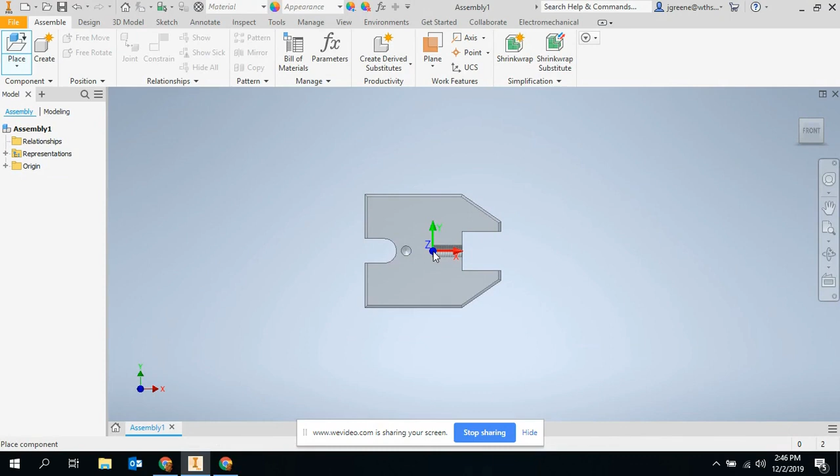So here's the base, I'm going to select open. Depending on how you draw it, you might want to utilize the right click menu to rotate this around. I'll right click, get a little menu that pops up, and rotate it on the X first to get it flat.

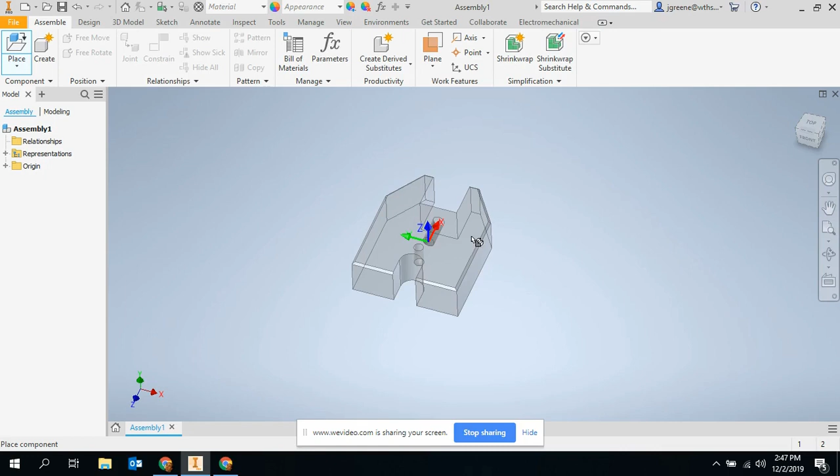Then if I look at it from an angle, I want to rotate it on the Z. Again, this might not be what yours is, but I'll go ahead and click that. Now, what I should have done is right click and place that grounded, but since I didn't, I'm just going to right click the part over here on the left and ground it. So that part's grounded. Next, I'm going to go ahead and place the column.

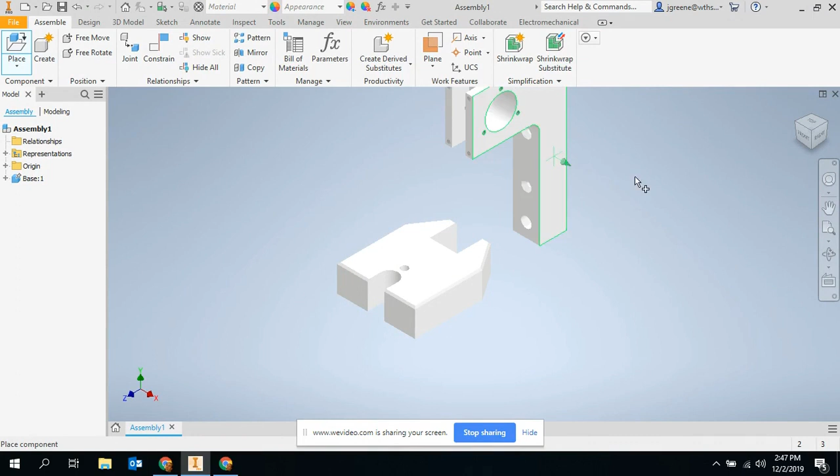I'm going to rotate the column on the Y a few times, click. First thing I'm going to do is align the screw hole for the column and the base. So I'll go constrain, find the center of this hole — either the centers work or the center of the threaded hole — and apply those.

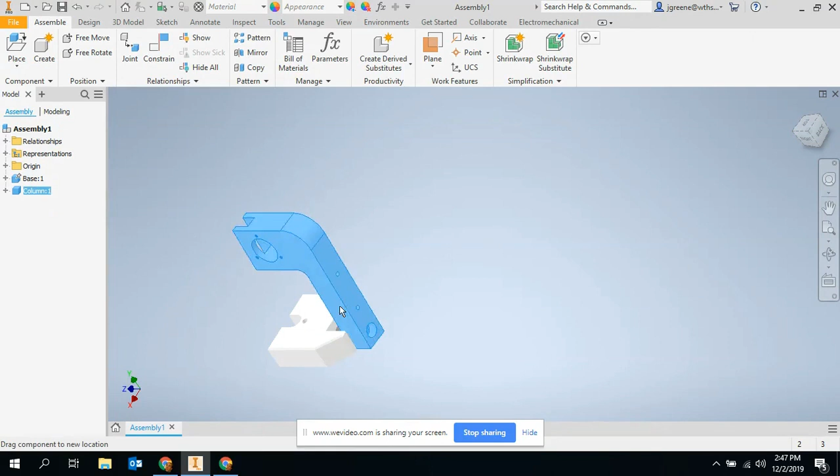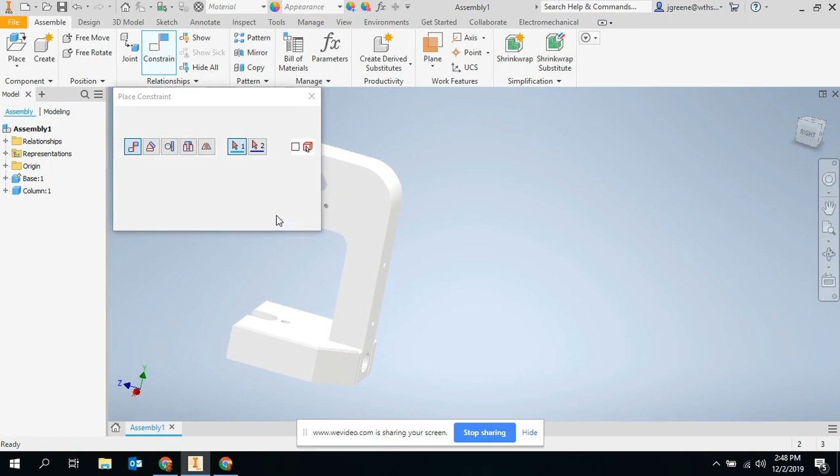I'm just going to cancel and bring that out. Then I'm going to mate the face here to this face, apply. If you do that, this will still be able to rotate around, and we don't want that to happen. So I'm going to constrain and actually flush the bottom of the base and the column, and that'll keep it upright. I'll apply that and get it in place.

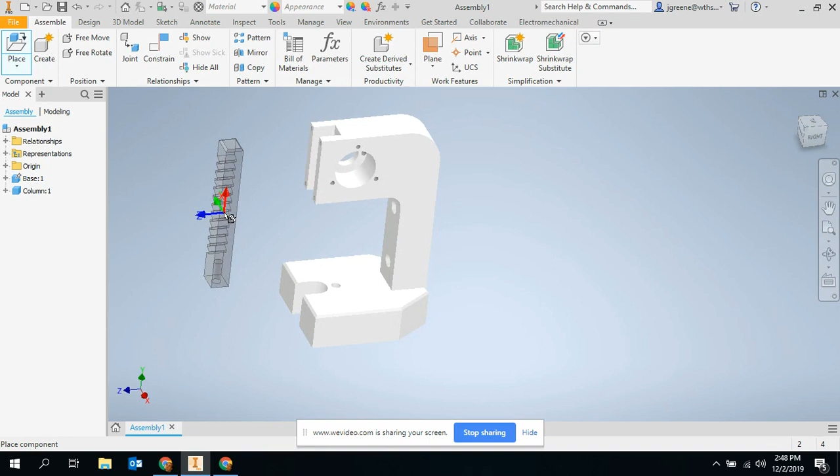All right, good deal. Next, let's go ahead and bring in a few other pieces. I'm actually going to bring in the rack next. Let's rotate that on the Z, and then on the X a few times. And there we go, so we kind of wanted that orientation.

Next, you can constrain this regularly if you want — you want that to stick inside of the channel here. I'm actually going to use a joint. A joint is a constraint, but the difference is a constraint is actually removing degrees of freedom, while a joint is defining more degrees of freedom, like it can move this way and this way only.

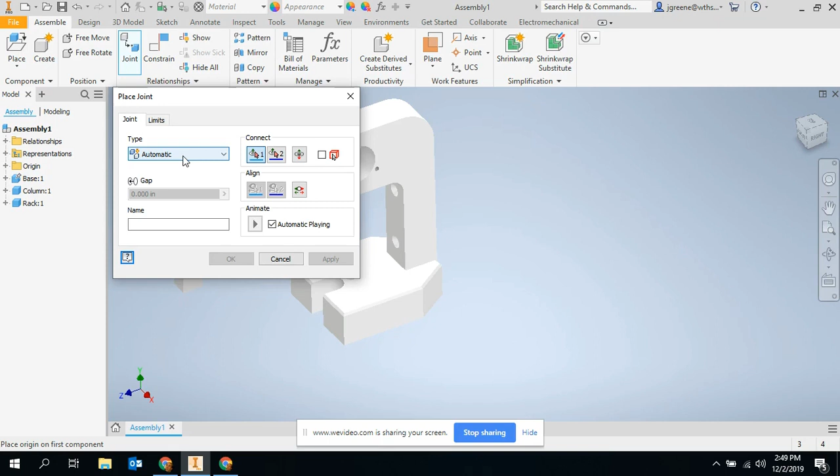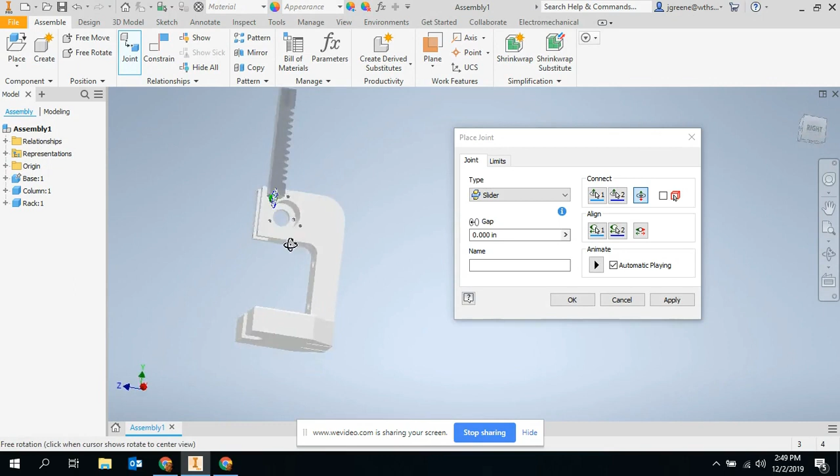So for this joint, I'm going to select a slider constraint because I want this to slide up and down. I'll select this face right here, the center dot, and select this center dot on this face. Now it's going to bring it in there. The rotation is the wrong way, but that's okay — we're going to invert alignment, so it is going up and down now, which is good.

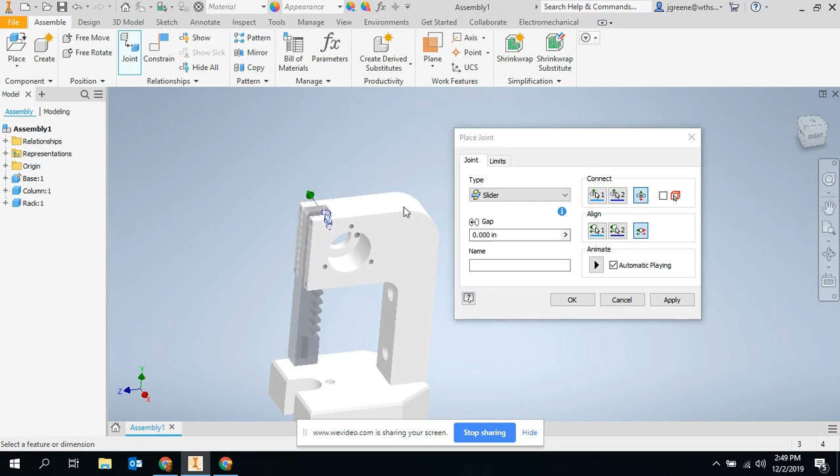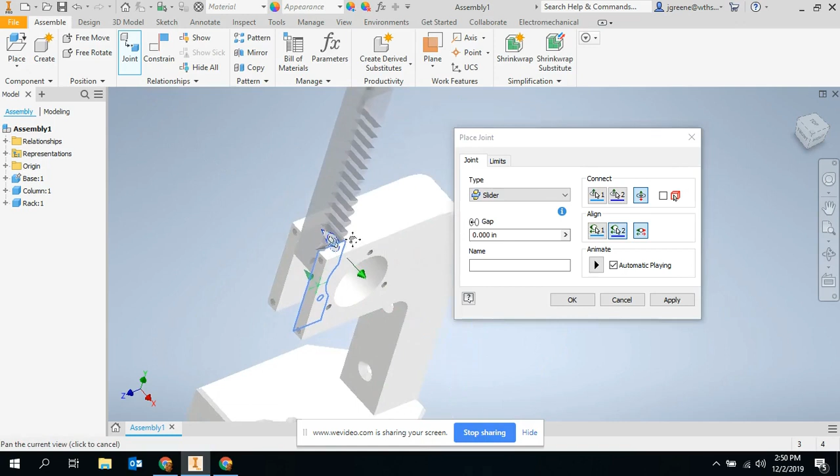Then I am going to change how it's connected. I know I want this connection to be there, and then for my second connection, I want this to actually rotate up and down. So let's put that in there and align it. Our first alignment is fine, let's do our second alignment — if you click on second alignment instead, I'm going to align this to a bottom face on the column.

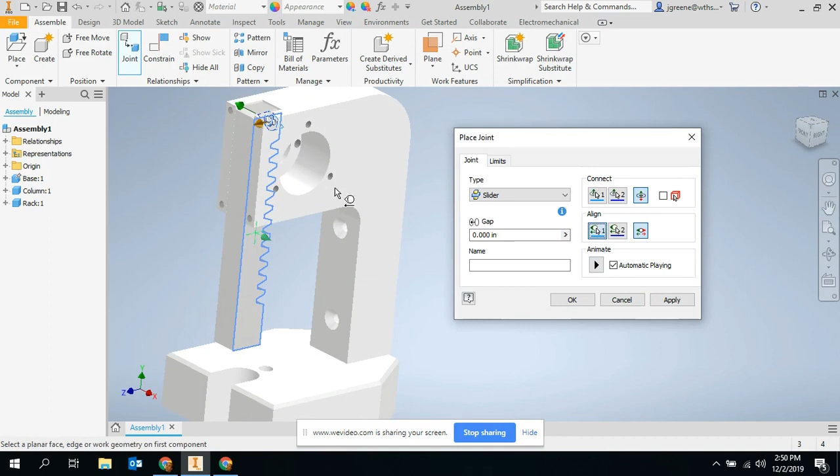So I'm going to select that inside face. It still moves that way, so I'll apply this to the top and say the top is going to align with the bottom of the column. Let's play that — there we go, that's kind of what I want.

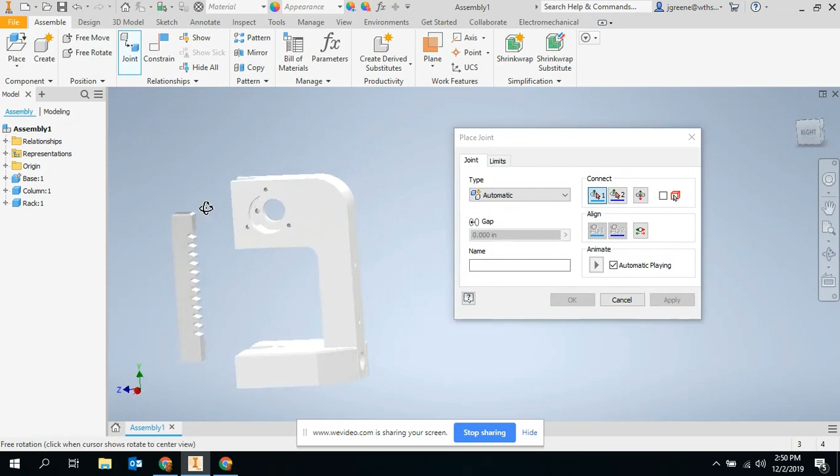So let's go through how we did that again. I'm going to go joint, select this face and this center dot once it shows up. I'll invert connection, change that to slider, and align.

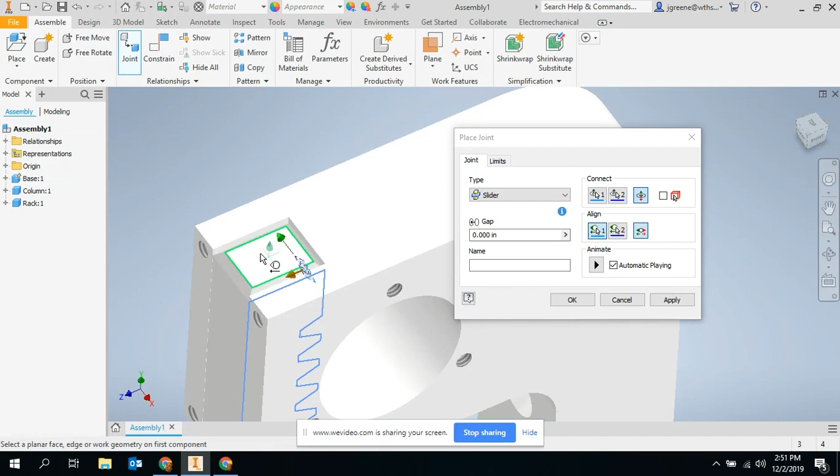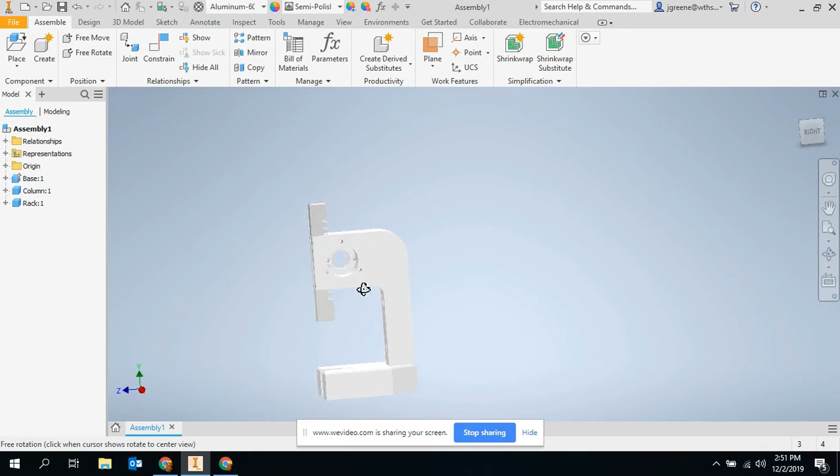So I'm going to select my first alignment, which will be the top of my device, and then it'll ask me for the second alignment, which will be the bottom of the column here. When I do that, you can see the two arrows, one going down, and I play that — that will be the motion of that piece in there. I'll apply that and double check — moves in there very nicely. Okay, next place, let's go ahead and bring in that gear.

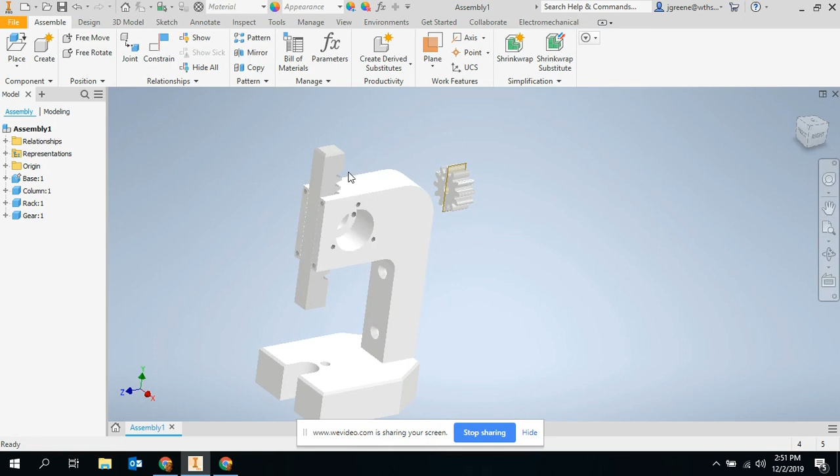Ignore the hole in this gear, it's just something I was playing with. But in this gear, what we'll do is constrain, and align the centers.

Then I'm going to flush this face of the gear and the face of the rack. Apply that. So now this should rotate in there. This goes up and down.

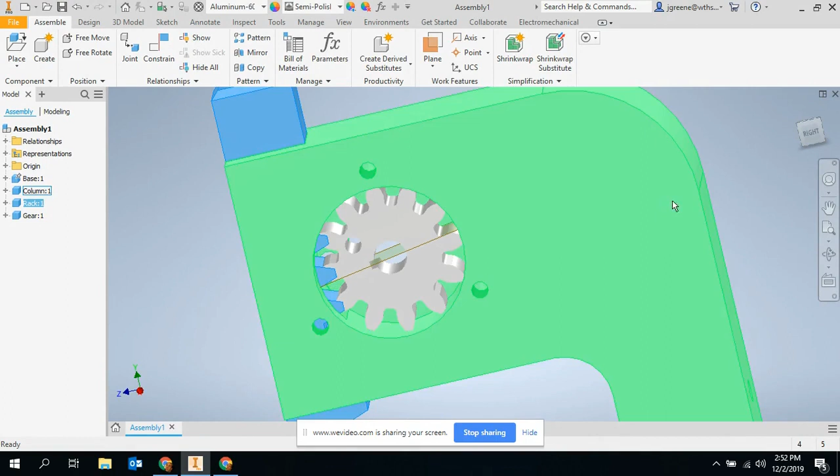Fantastic. I'm going to do one more constraint here, aligning these. So I'm going to move this so my gear is actually between the gears on my rack, kind of like this.

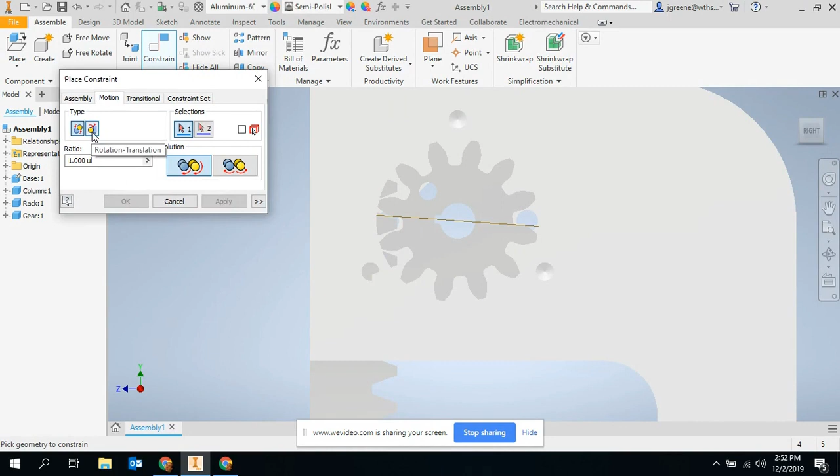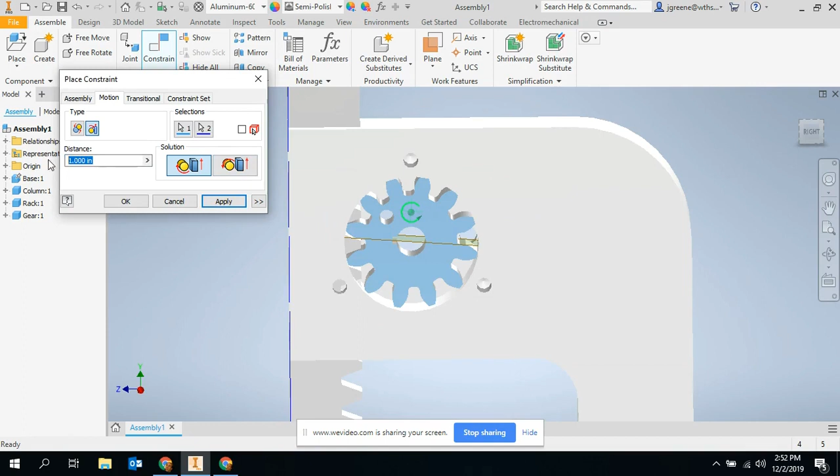Now I'm going to constrain, and I'm going to make a motion constraint, selecting rotation translation. This is rotating, this is translating. I'll select this face as my rotating component, and then select an edge over here on this face as my translation component. My distance is essentially how much I want this to move for every one rotation, and that's going to be a ratio of pi.

So I'm going to apply that, and just double check it's not going the wrong way - that sometimes happens. So there we go. As I move the gear, my rack also moves. A little rotational constraint, pretty neat.

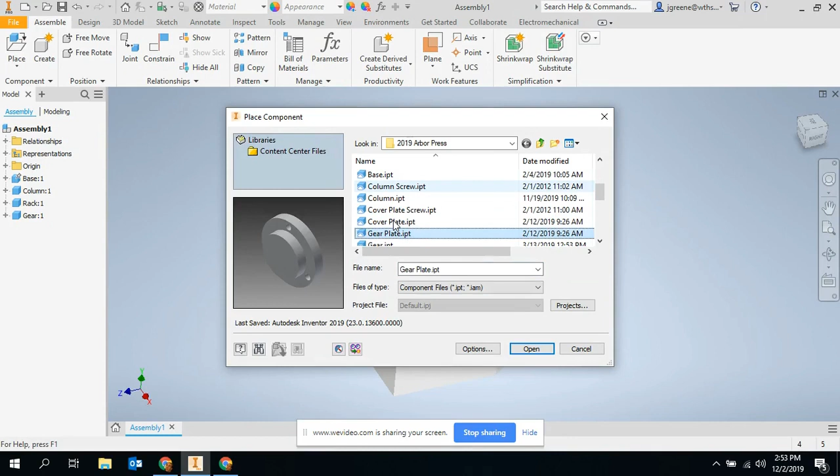So I have that in place. I'm going to go ahead and place now - let's see, what else. Eventually I'll bring those in - I'll bring my cover plate in, that can go over there. My gear plate, bring that there.

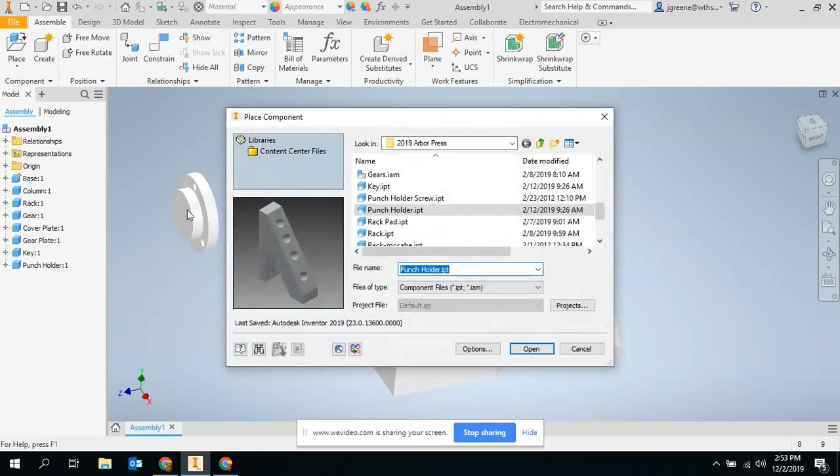Bring the key over there. Punch holder on the back. Rotary actuator back here. Table, and then the table pin, and then we'll put in some screws and stuff later.

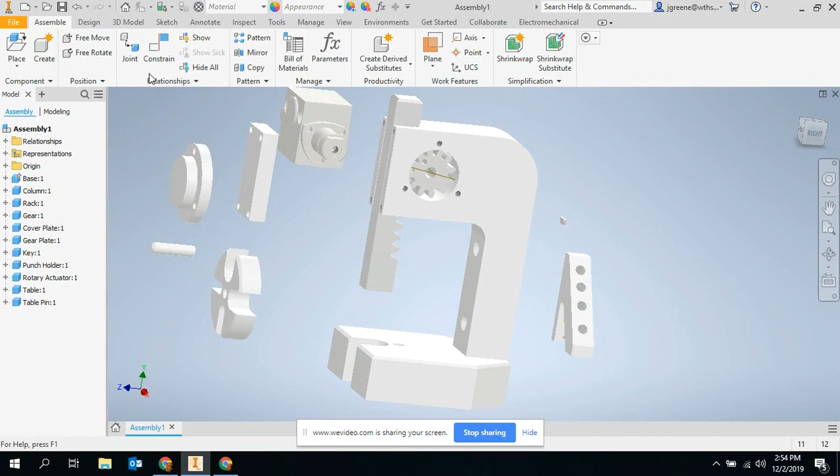So alright, for this we got our table. Let's go ahead and constrain the centers of the table and this little hole right here. Apply. I'm going to bring that up a little bit, and constrain the bottom of the table to the top of the base. Apply. Then I'm going to align the centers of this together.

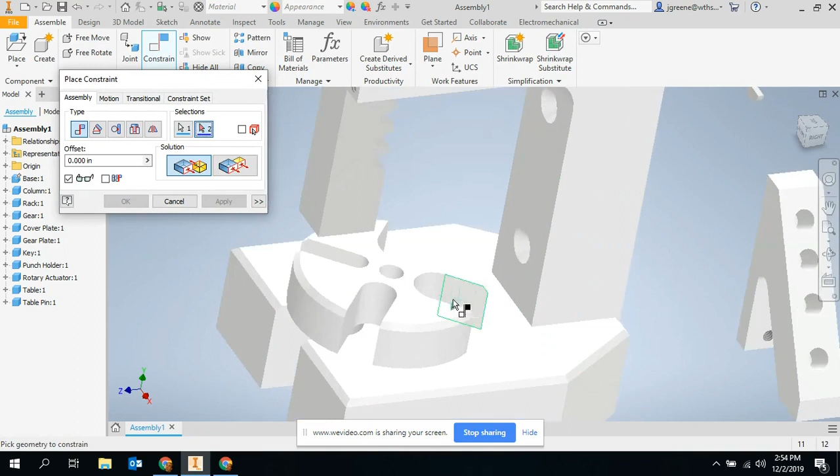And then I want to swap that because I want the chamfer to actually go down into the hole. Actually, do I? I think so. And then I want this to kind of sit down in the hole.

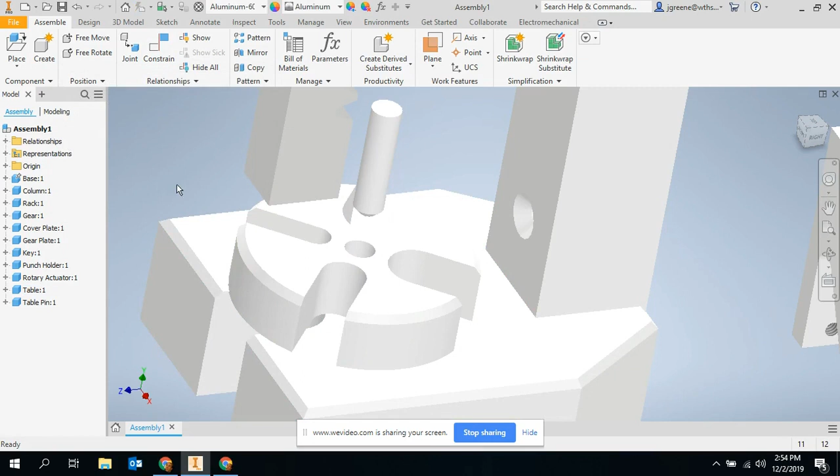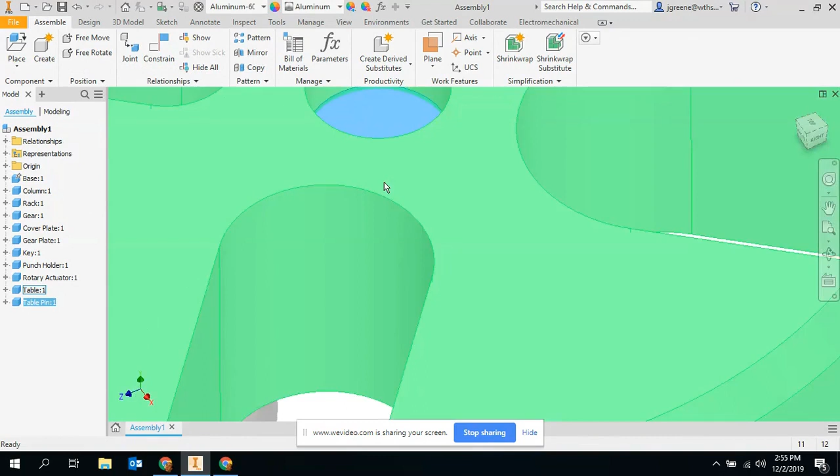So what I'm going to do is constrain this edge - this is going to be hard to see, actually, but I'm going to rotate it so I can see this edge right here. So this is the bottom of the hole, and I'm going to align those two edges together, putting those two together. The top of it is just like a little bit offset in there. And this will still rotate around there.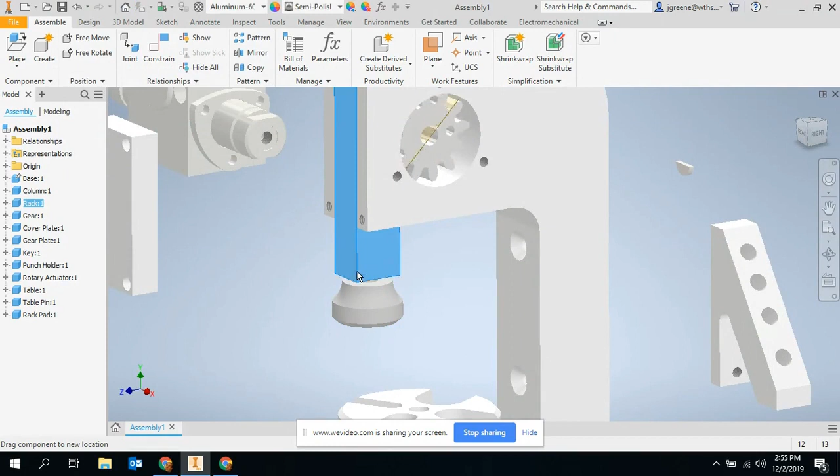I'm going to bring this up, and I know I have a rack pad. I'll bring the rack pad in because that's an easy one to constrain - the center of the rack pad to the center here. I'm just going to drag this up a little bit, and constrain the faces. Apply that. So now that can go up and down.

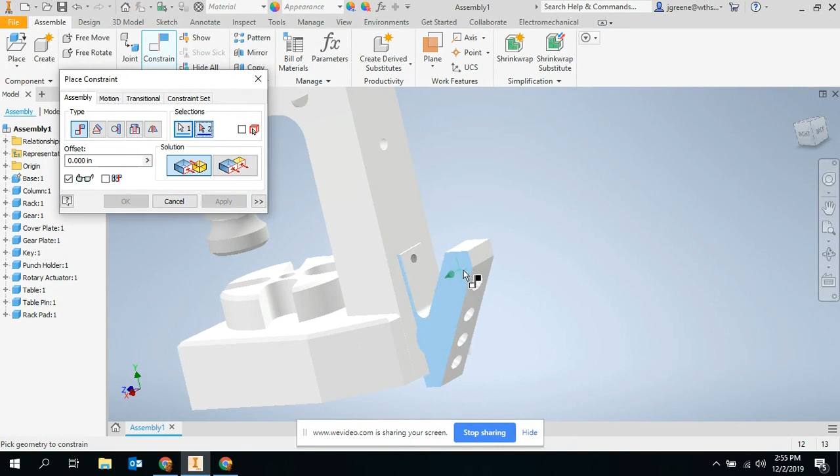I'll constrain the back punch holder to here. I'm going to flip that. Apply. And then I'll constrain the top - get the center there, that should line up.

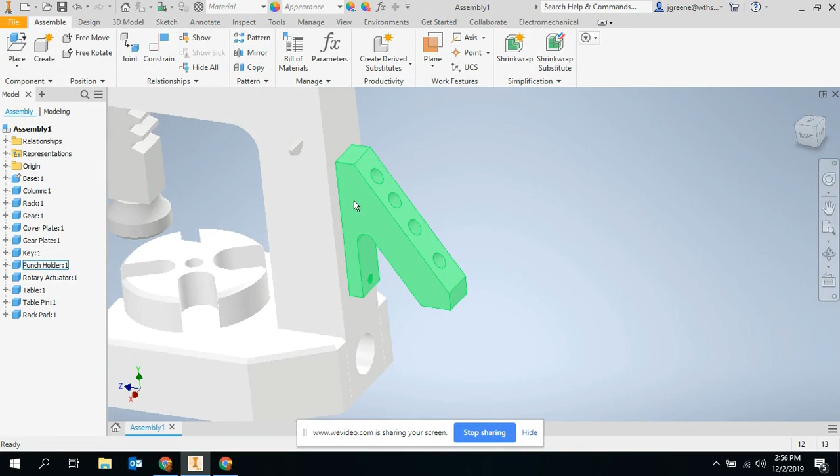And then the back here and the back there. If those centers don't line up, that means the distance between those two holes is wrong, either on your column or on the punch holder. Okay.

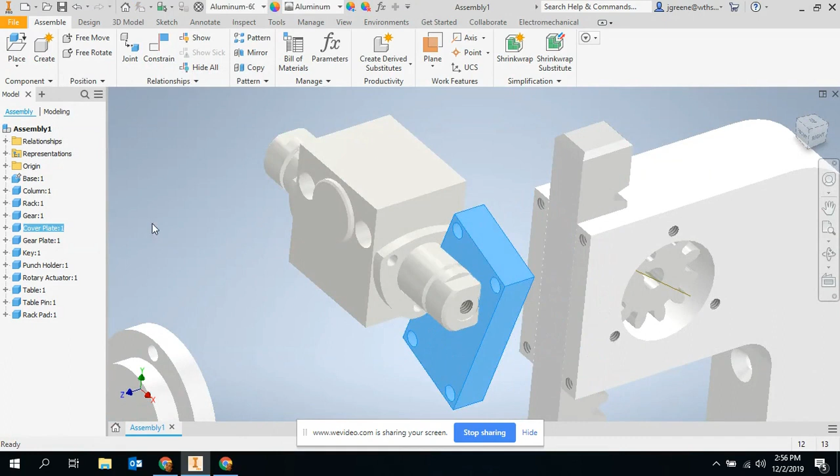I can put this front cover on. So I'll line up that hole - this will be able to rotate on there. So I'm going to align this hole with this bottom hole. So I kind of just did the two opposite holes.

And then I will throw the faces aligned - make sure I click the right face. So that face and that face. Okay, so that's in position. Looks good. Now the gear plate.

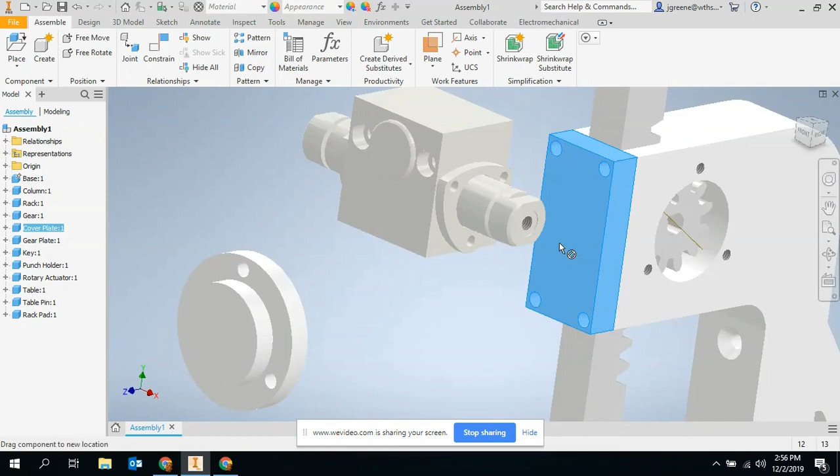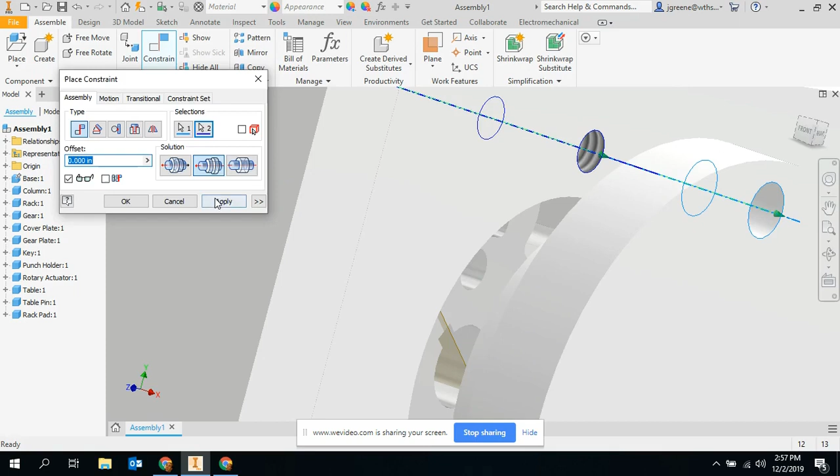Line up the centers of that and that. Apply. Pull it out just a bit. Now I'm going to line up the center of these holes. I only need to do one, the other two will be good.

And then I'm going to throw this face onto that face. Apply. So now that's covered on that side. This still works. Okay.

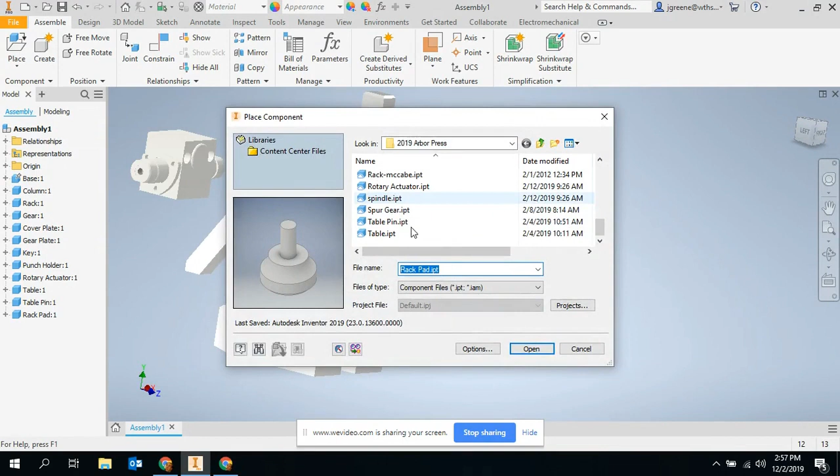Next, I need to bring in the spindle. Okay, so the spindle already has a key in it, which makes it nice and easy. So the spindle is going to go right here in that area. So to do this, I'm going to first align this...

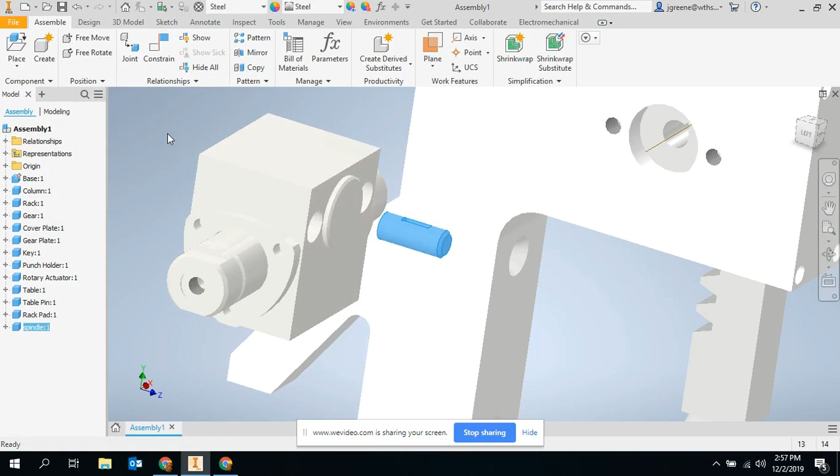and then this face, this kind of little nub that comes up - I'm going to align those two. This comes out. Then I'm going to constrain this face to that face. Apply. And then this should still be able to turn, which it does. Okay.

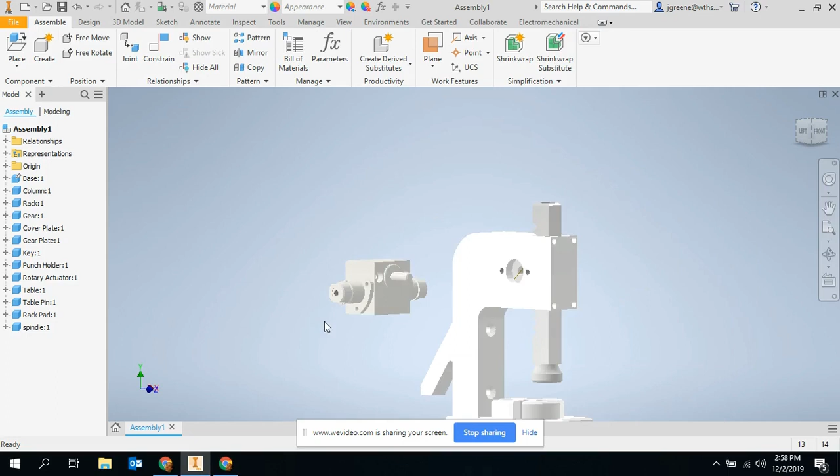Okay, next. Do we do this one yet? Sure. I'm going to go ahead and constrain this to this piece right here. So we'll just line up the holes over here and here.

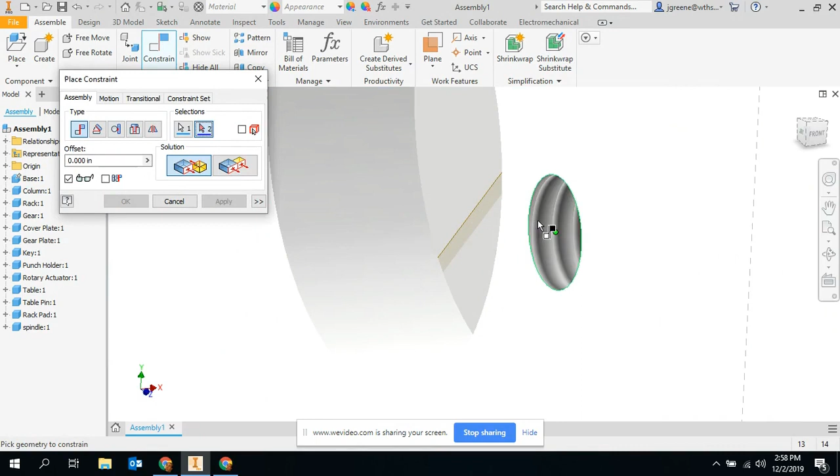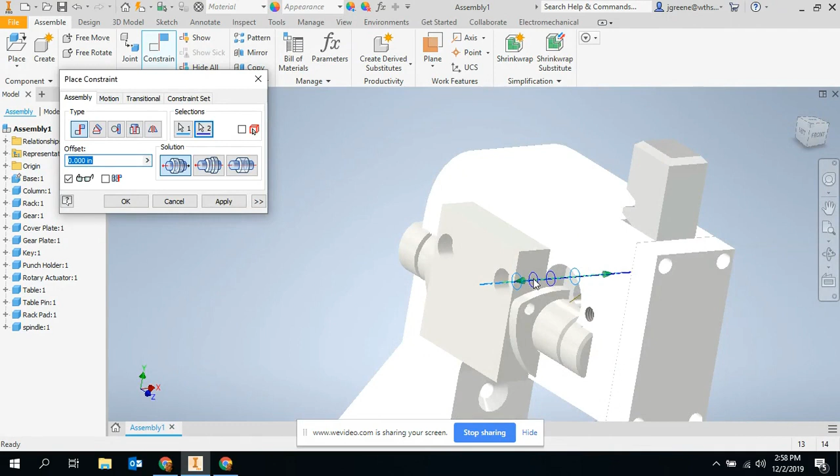All right, so I think this needs to be flipped. So this hole will need to go into this hole. Apply, and then this one aligned with this one. Apply. Let's pull this out. Does that make sense? Yep.

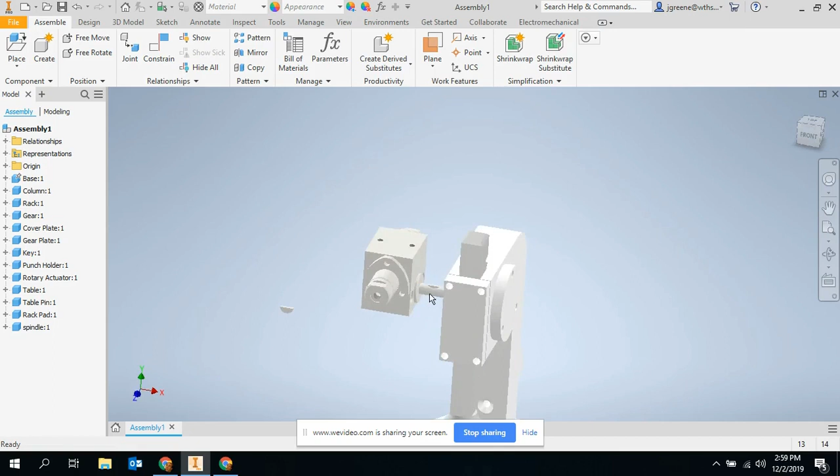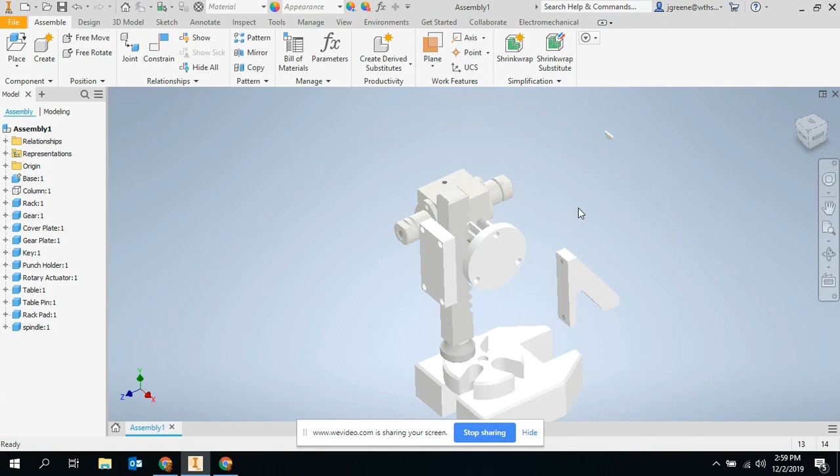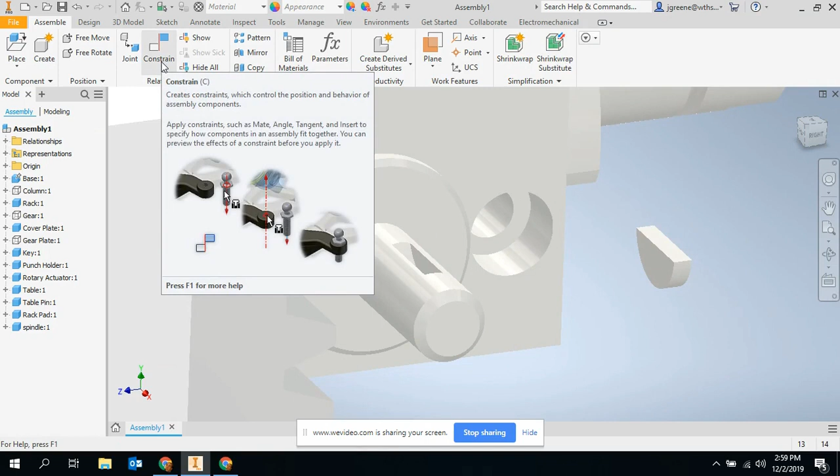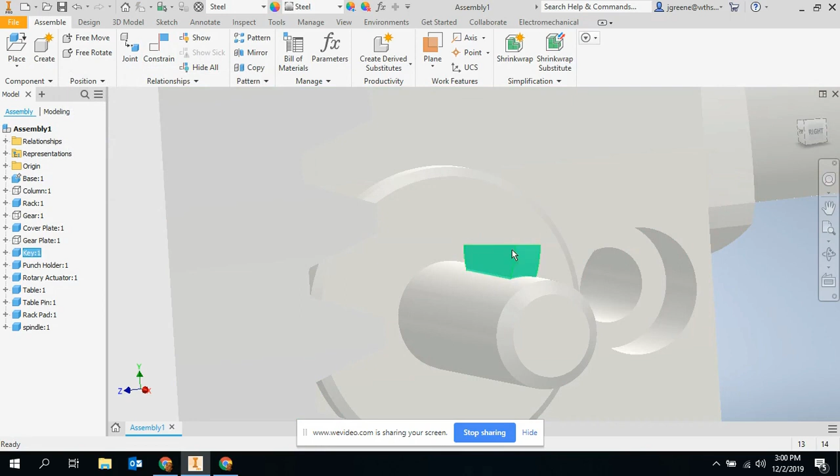For the key, we're going to go ahead and put the key in now. So the best way to put this key in is going to be, let's do this. I'm going to constrain this face to this face right here. I will then constrain the centers together, apply, and then it'll be in there, but you can see here it can kind of rotate, or it can rock back and forth in that little area.

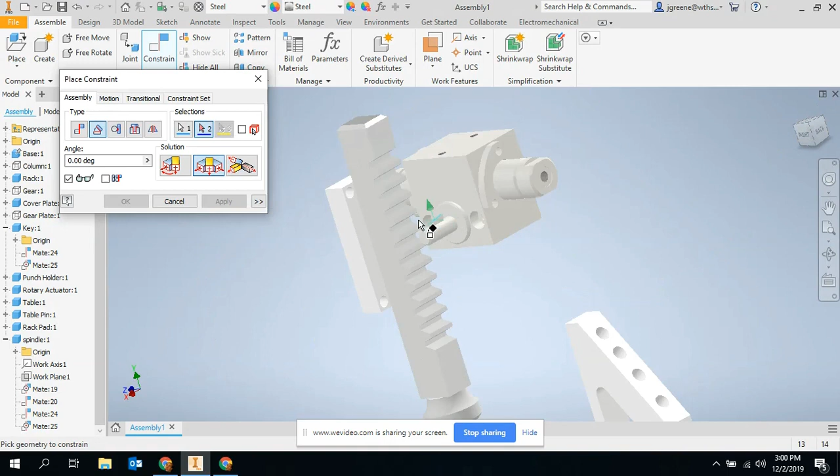So now in my spindle and in my key, I'm going to go constrain. I'm going to go angle, go to the top of my key, click the top, and do an undirected angle. And I want this angle to always be 0 degrees from a part on the spindle. This will be the XZ plane in this case. So I'm going to apply that, and then this should rotate and not move around too much, which is fantastic.

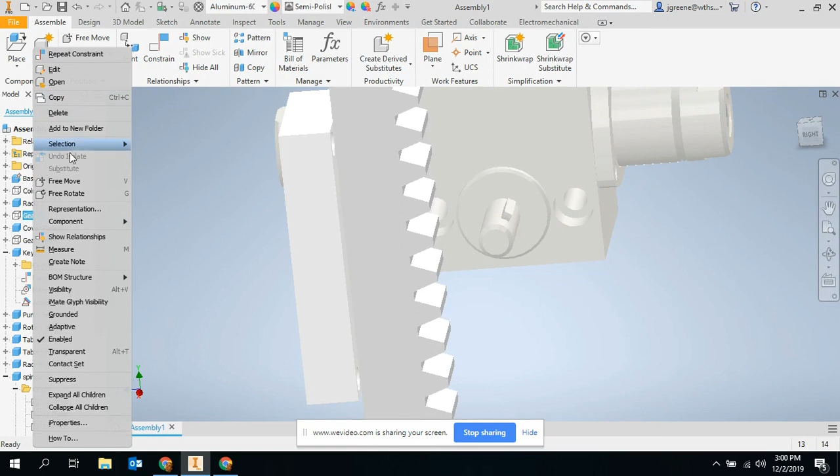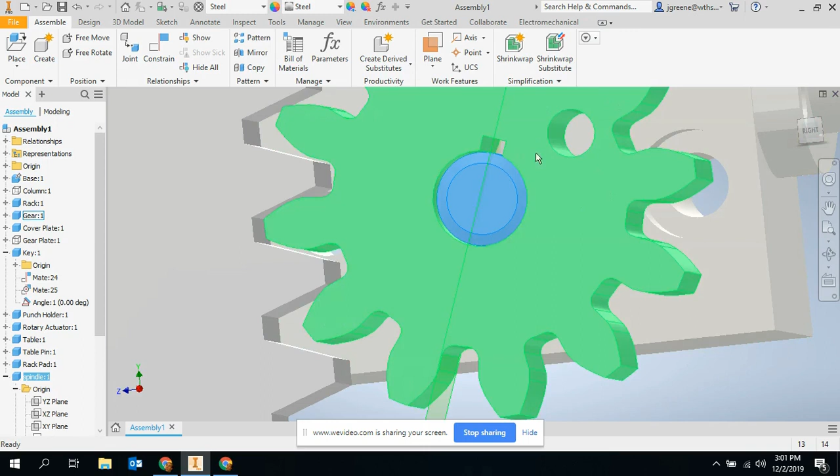I'm going to find my gear, and I'm going to turn on the visibility of my gear. And it's going to be a little difficult. Let's see if I can get this done. What I want to happen is as I turn this spindle, I want to be able to also turn the gear. So I'm going to rotate this till I see the key. I can see the side of the key in there.

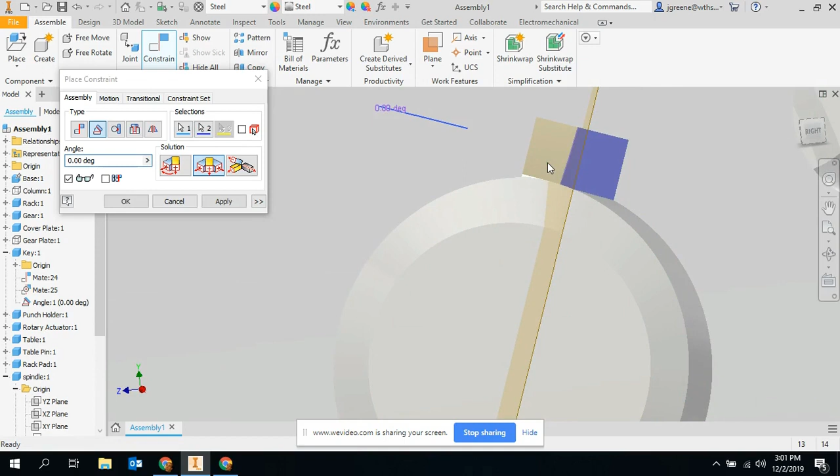And I'm going to say that this side of the key is going to be, I'm not going to make it flush because it might not be the same size. So I'm going to do an angle undirected again between that face of the key and one of the sides of the keyway. I'm going to apply that. So now when I turn this spindle, it turns the gear and it turns the rack.

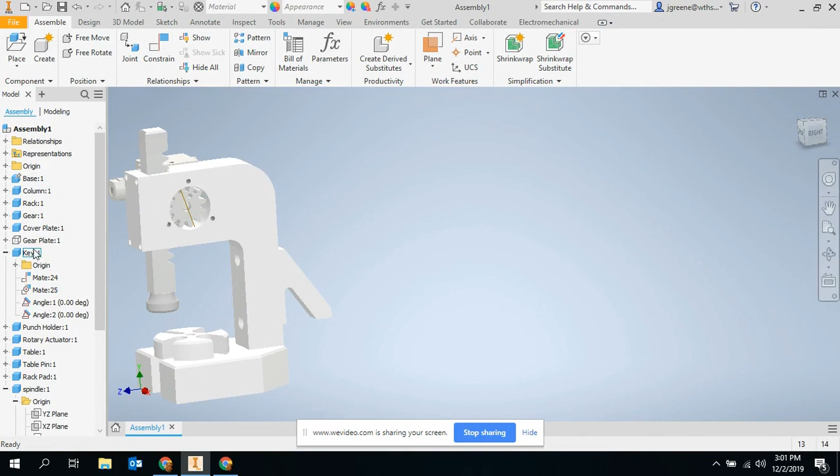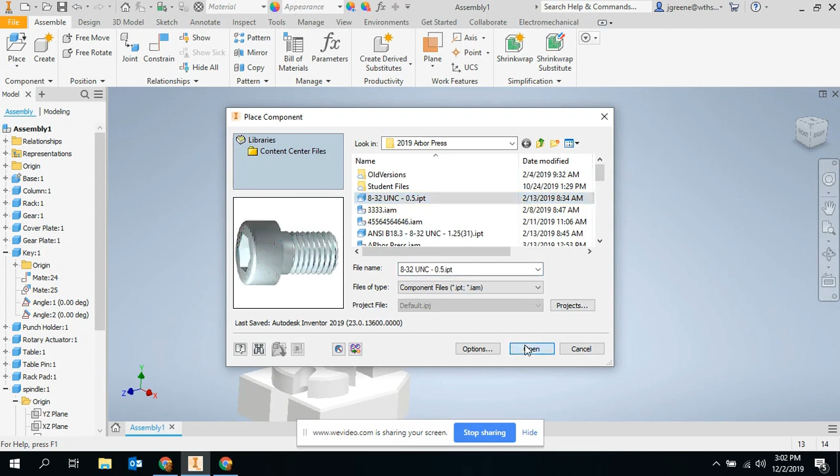I can go ahead and turn on the visibility of my other parts. And I pretty much have all the major parts in there for this. The next part is actually just to go ahead and insert all the screws and go from there. So I'm going to just quickly show that one. So we've got an 8-32 half-inch screw. This one will actually go into these areas, so this is easy. I'm going to go constrain in there.

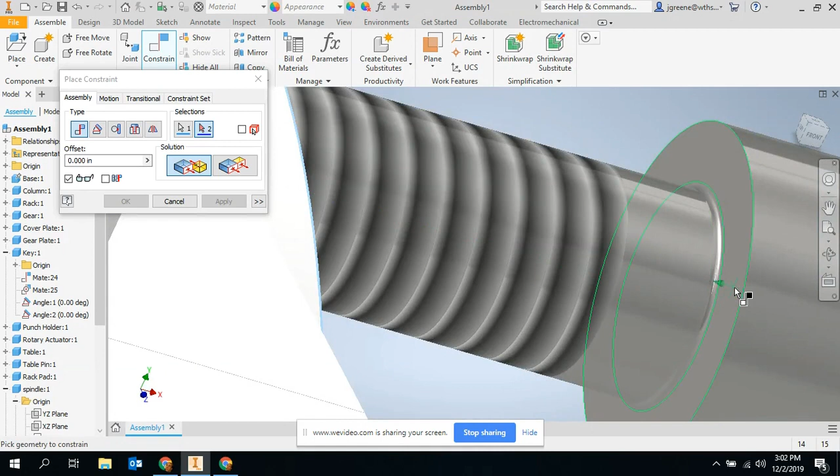I'm going to flip that, apply, and then I'll just say that face and the face on my screw right here, those should be touching. Apply. And there's one screw. So that's kind of the operation you're going to go through for each one. For the countersunk screws here, instead of doing the inside face, let's see if we can find that countersunk screw.

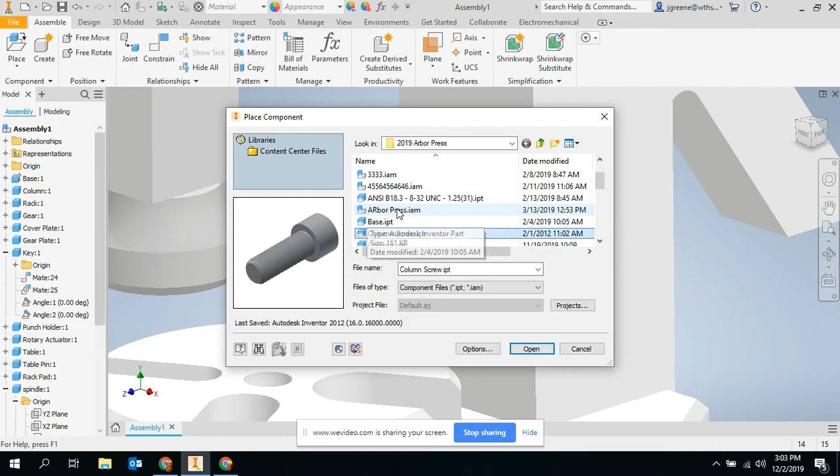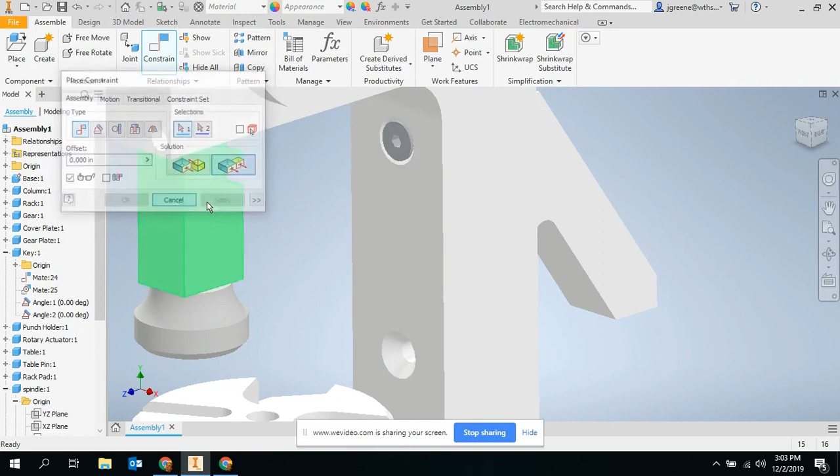It's a large column screw, cover plate screw, punch holder screw. Open that. Same thing here and here. Flip that, apply. And then this one I'll do a flush from this face and the column screw. I'll apply it there. So now that is in position, screwed in there.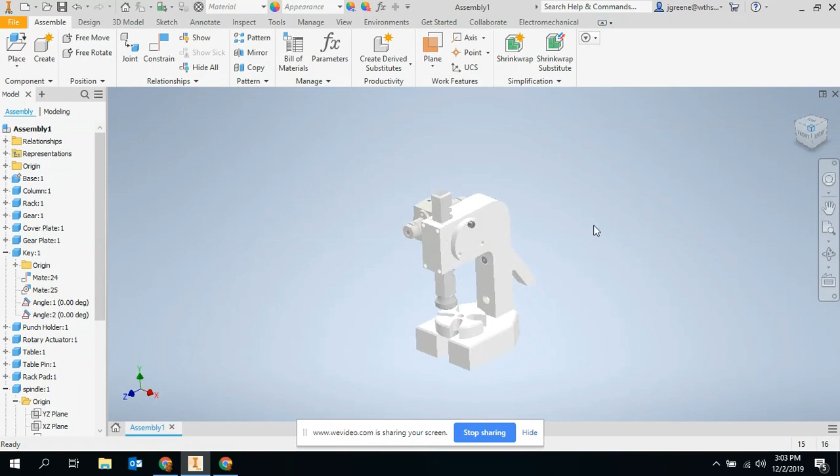You can do the same thing for that one. You have a screw down here. You have 4 here, 2 more here, and then the 2 back here to put the actuator on, and you have yourself your assembly. So not a quick vid, but something to refer back to as you need help with stuff.